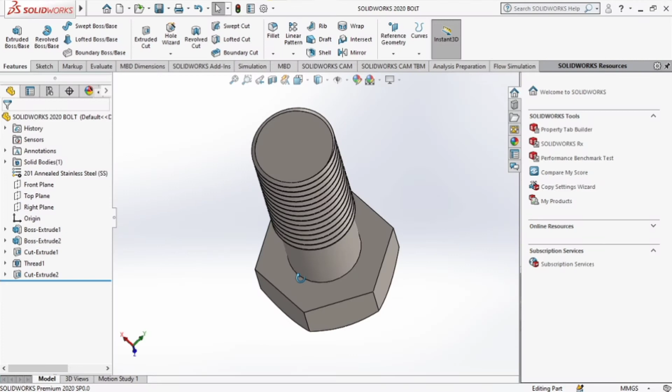So we click on new part and you can see the dimensions. It's pretty much the same diameter, the only difference is the length is going to be 36.4. We select the material, and we're still going to be using 201 annealed steel.

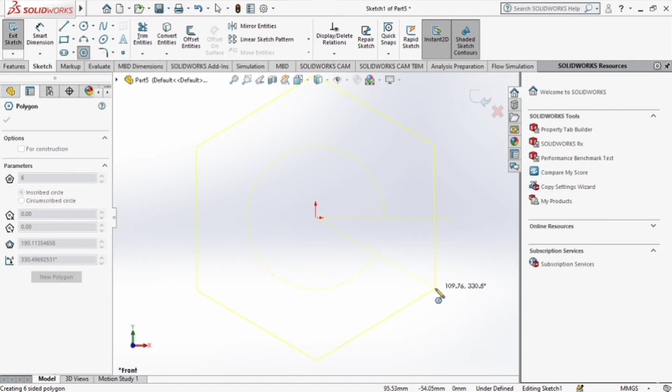We apply and close. We go on the front plane, select normal to, go on the hexagon, and right at the center draw a hexagon. We'll give the circle of the hexagon a diameter of 80 millimeters.

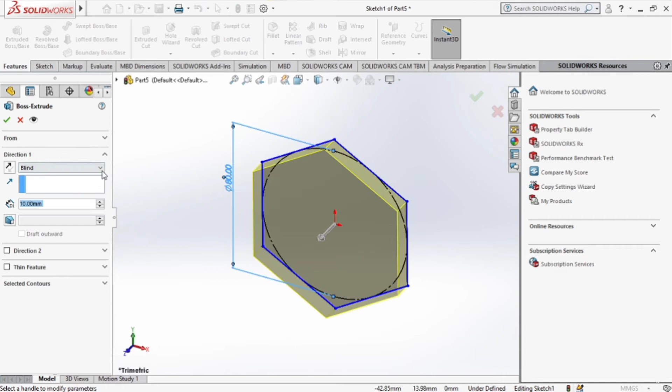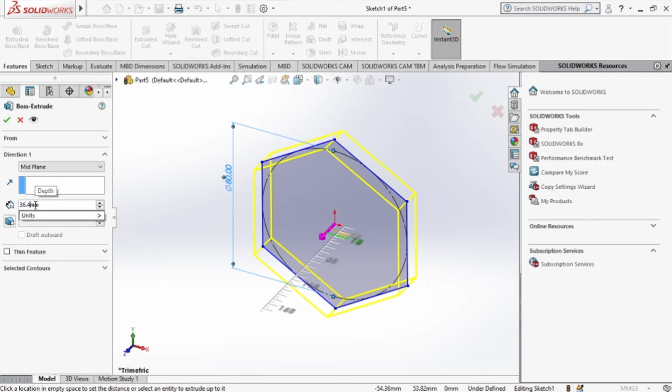You can go on the extruded boss base. One thing we'd like to do is change the plane to not the mid body, not the upper body, but just the mid plane. Just to confirm, it's 36.4 millimeters, so we can give a depth of 36.4. We click OK.

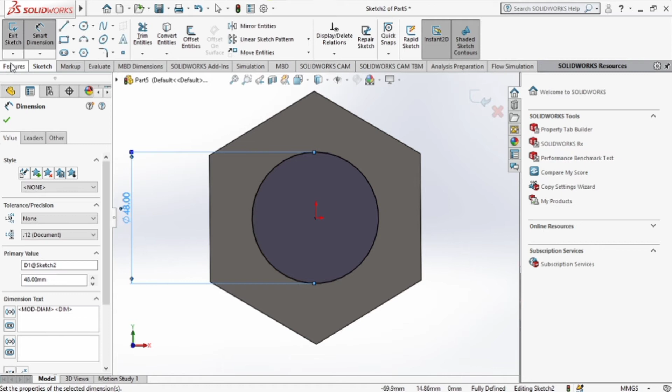Next up we'd like to draw our circle right in between. So we sketch a circle of diameter 48 millimeters, and then we extrude a cut, because that's where we're going to have our internal threads from.

You can extend it just to make sure it does cut through. It's supposed to be a through and through.

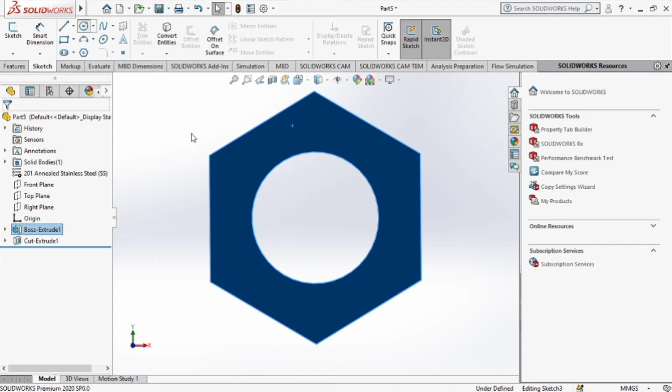In this case, one thing we'd like to do is try to chamfer the area. So we select the hexagonal plane, then sketch a circle that has the same diameter as the hexagon, which is 80 millimeters. Let's make sure it is 80 millimeters. It is.

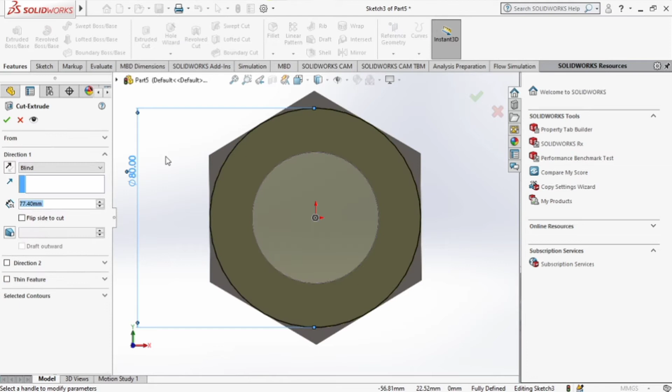We go on features and do an extruded cut, but it's going to be slightly different because we just want to chamfer the area. So we reverse the direction, then select flip side to cut, and give it an angle of 45, increase the distance a bit, and there we go.

Since we want to chamfer both sides, we can just select the linear pattern and go for the mirror.

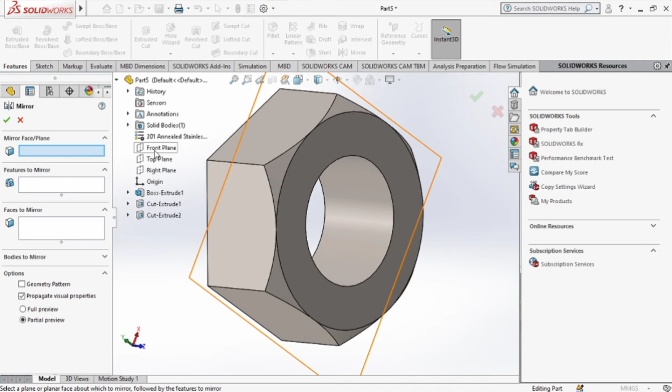In this case our plane is going to be the front plane. So right there on that yellow part, we go on the front plane, there's a drop down, just go on the yellow plane, and there we go, done.

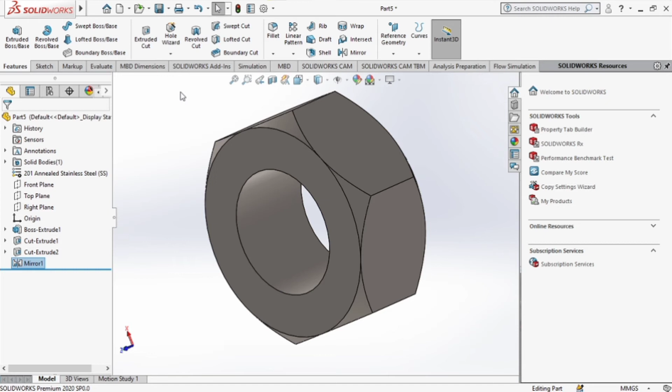So we can go on our wizard over there, and I'm going to go to thread. The start of the thread is definitely going to be the edge of our bolt, the edge of our extruded hole, so we can just go right there.

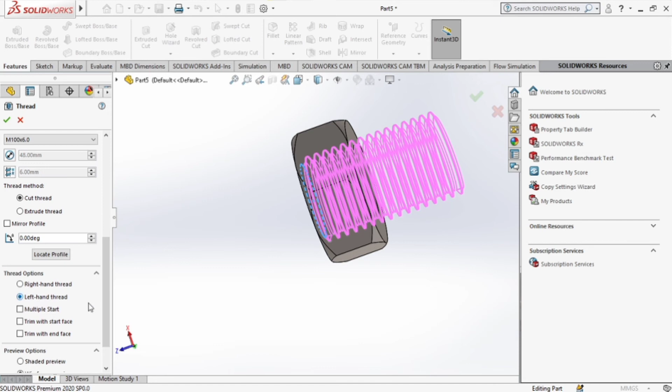I'd like to change a few things there. One thing I don't have to change is that they are going to be internal threads, so there's no need to change that, but they have to be left-handed threads because those are the threads we had. You can offset a bit. What we want to do is center the threads so they're not starting from a particular point, just like that. We just want them to be in between, so that the screw can go around the bolt without having any issues.

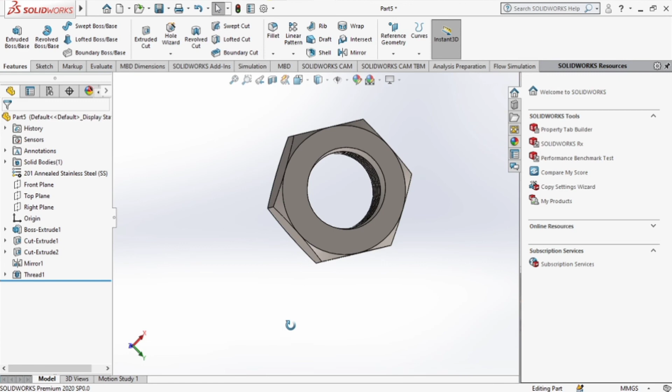And yeah, so we do have our internal threads. Next thing we want to do is just save.

Or you can give it a name of a nut, if you will. That's it for this video, a very short one. We just wanted to have a better understanding of how to design a nut.